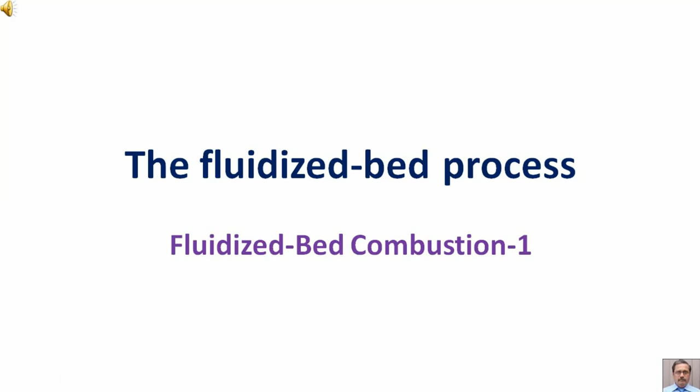The fluidized bed process. Fluidized bed combustion part 1. The fluidized bed process. The fluidizing process induces an upward flow of a gas through a stacked height of solid particles. At high enough gas velocities, the gas-solids mass exhibits liquid-like properties. Thus, the term fluidized bed.

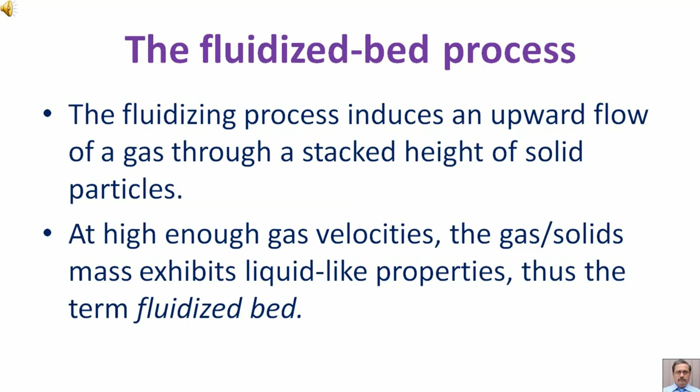Typical fluidized bed conditions. Figure A shows a container with an air supply plenum at the bottom, an air distributor that promotes even airflow through the bed, and a chamber filled with sand or other granular material.

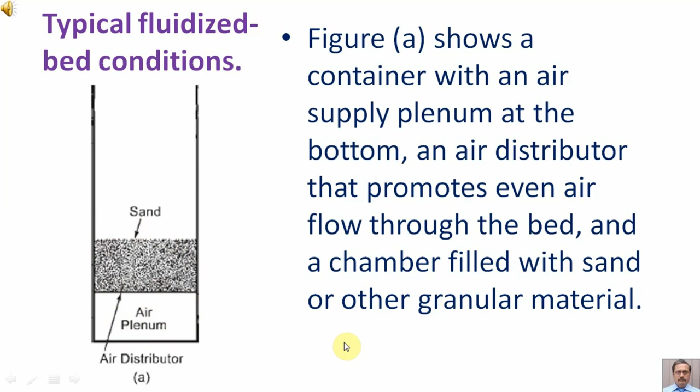If a small quantity of air flows through the air distributor into the sand, it will pass through the voids of an immobile mass of sand. For low velocities, the air does not exert much force on the sand particles and they remain in place. This condition is called a fixed bed and is shown in figure B.

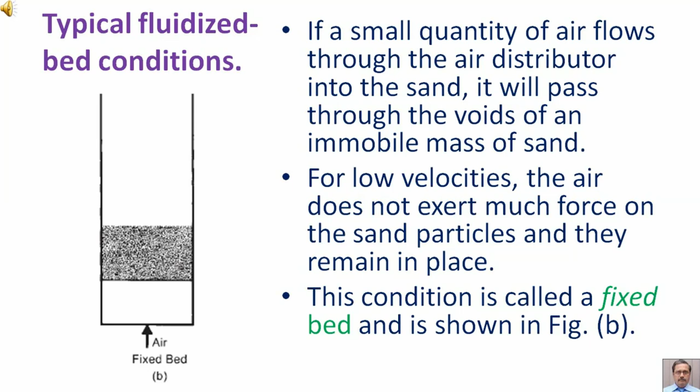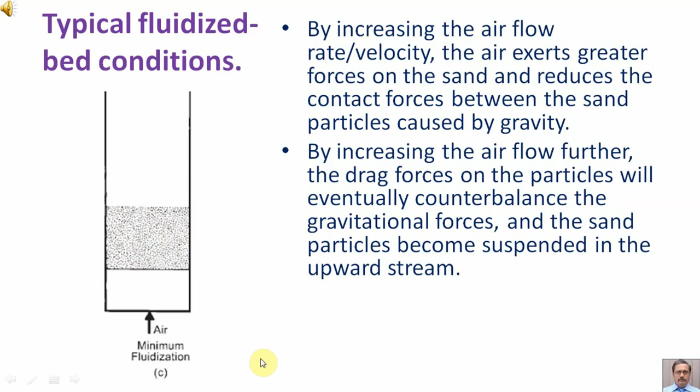By increasing the airflow rate velocity, the air exerts greater forces on the sand and reduces the contact forces between the sand particles caused by gravity. By increasing the airflow further, the drag forces on the particles will eventually counterbalance the gravitational forces and the sand particles become suspended in the upward stream.

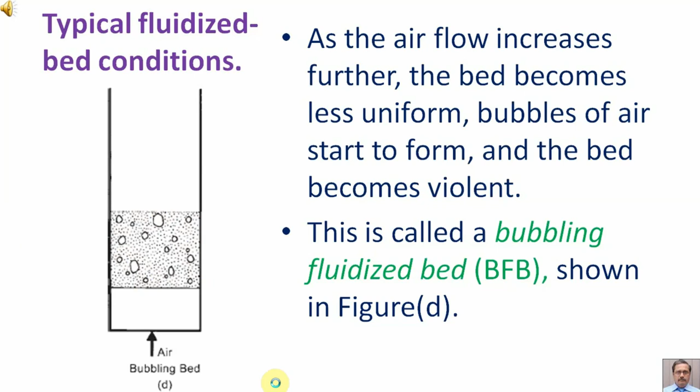As the airflow increases further, the bed becomes less uniform. Bubbles of air start to form and the bed becomes violent. This is called a bubbling fluidized bed, in short BFB, shown in figure D. The volume occupied by the air/solids mixture increases substantially. There is an obvious bed level and a distinct transition between the bed and the space above.

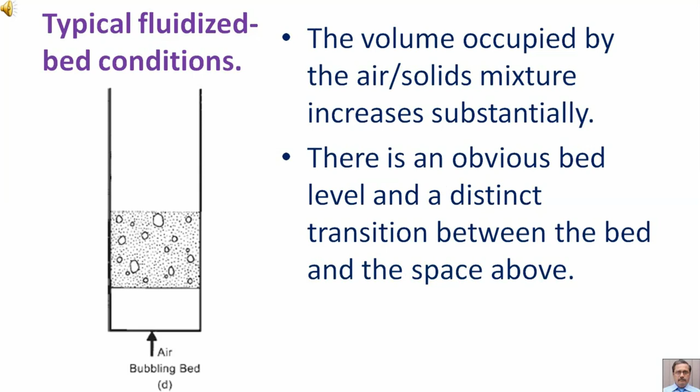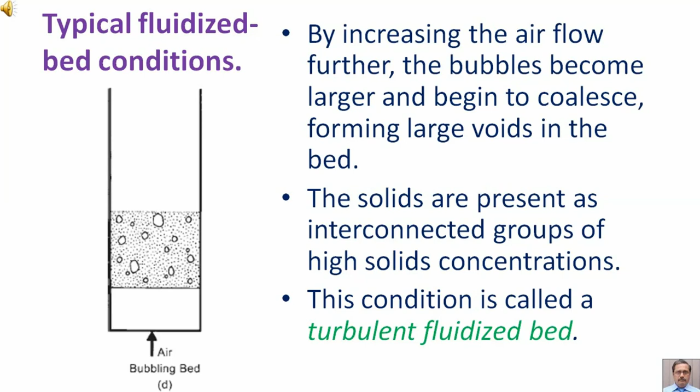A further increase in airflow causes the particles to blow out of the bed and the container. If the solids are caught, separated from the air, and returned to the bed, they will circulate around a loop defined as a circulating fluidized bed, shown in figure (e).

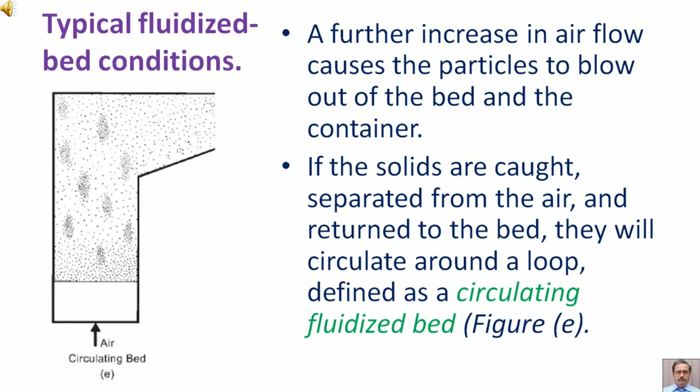Unlike the bubbling bed, the CFB, circulating fluidized bed, has no distinct transition between the dense bed in the bottom of the container and the dilute zone above. The solids concentration gradually decreases between these two zones.

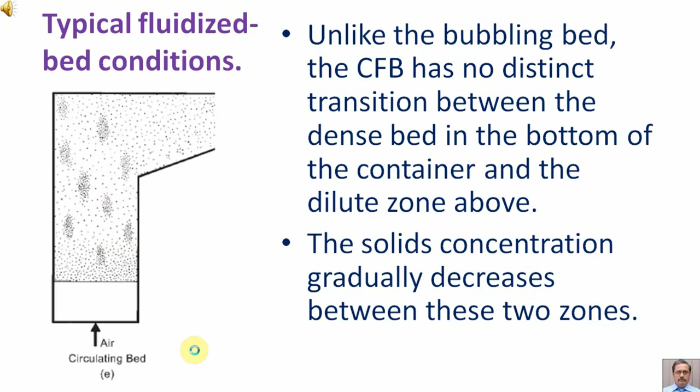Effect of velocity on bed pressure drop. The pressure differential between the top and the bottom of the container changes with airflow as shown in figure. At low airflow, the pressure differential increases with flow through the static bed until reaching the minimum fluidization velocity. At this point, the sand is supported by the air and the pressure differential is determined only by the mass of the bed material.

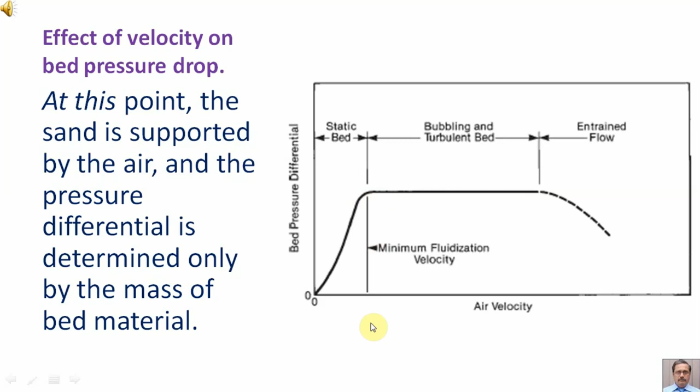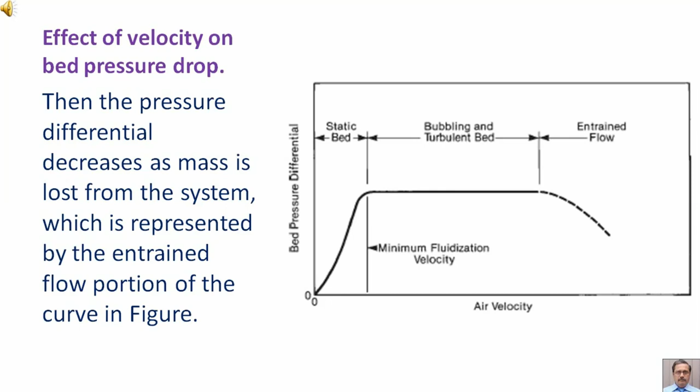The pressure differential is independent of further increases in airflow until the air velocity becomes high enough to convey material out of the container. Then the pressure differential decreases as mass is lost from the system, which is represented by the entrained flow portion of the curve in figure.

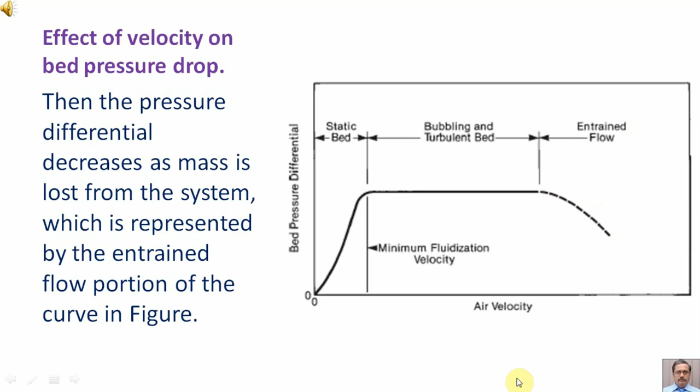Sauter mean diameter, in short SMD, an important parameter for evaluating hydrodynamic and heat transfer performance of particle mixtures, is the Sauter, also called volume-surface or harmonic mean diameter, SMD. The expression for SMD is given.

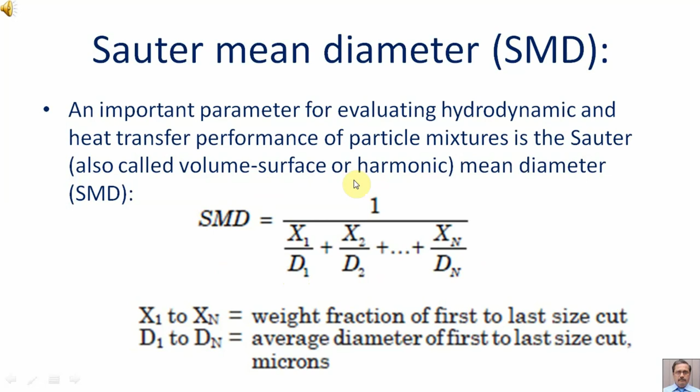Bubbling bed and circulating bed. Of these fluidization conditions described above, only bubbling and circulating beds are currently used by the power industry to generate steam.